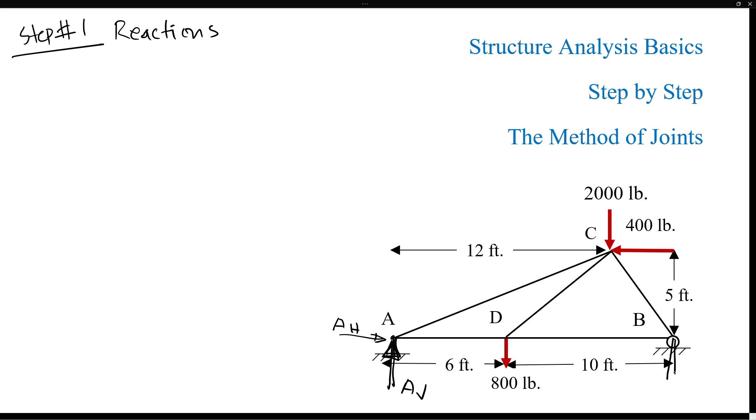So here we have a knife edge connection at point A. So if you remove that, there will be a vertical force AV and a horizontal force AH, and then you remove this rolling contact at B, so there will be only the vertical force. So we have the free body now, all the external forces are shown. To find the reaction forces, you'll have to take moments at each of these points. So if you take moments with respect to A and sum everything to 0, that will give you the reaction

at point B. So for the 800 pounds, that will do actually a clockwise moment with respect to A. So it will try to rotate clockwise. So that's going to be negative 800 pounds times the distance from A, 6 feet, minus the 2000 pound, which will also do a clockwise moment, and that is 12 feet away from A.

And then the 400 pound will do a counterclockwise, so it will try to rotate the whole structure counterclockwise. So that will be a positive moment, 400 times, and the line of action of that force is only 5 feet away from point A. So we can say 5 feet there, plus the reaction at B will also try to push this upward right here and rotate the entire structure counterclockwise with respect to A.

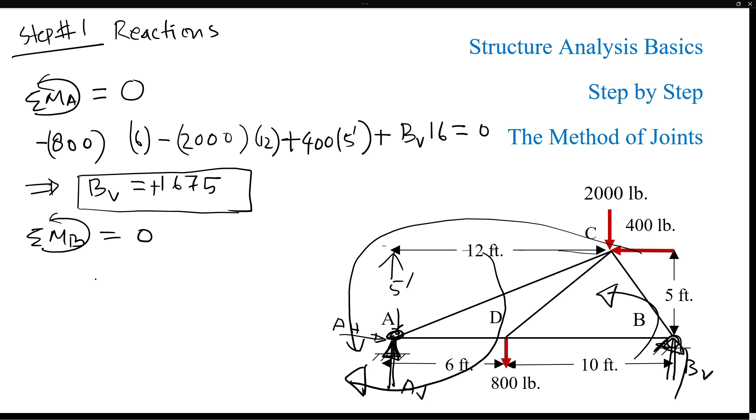And then if we take moments with respect to B, similarly we can calculate the reaction at A. So the 2000 pounds now will cause, with respect to B, a counterclockwise moment. So that's positive times the distance of the 2000, which we can calculate as 6 plus 10 minus 12. Then plus the 800 pound will also do a counterclockwise moment, that is 10 feet away from B,

and also we have this plus 400 pound at C. With respect to B, it will do a counterclockwise, and the line of action of that 400 force is 5 feet from B. And then we have the reaction at A, the vertical component. So that will do a clockwise. It will try to push this structure upward, making a clockwise motion, and it's a total of 16 feet away from B.

So then we can calculate the reaction at A. I found that positive 1125. And the horizontal reaction at A, we can simply do summation of Fx, that will give us the horizontal reaction. So plus AH minus 400, that's the total load in the horizontal direction. So AH will be 400. So this is step number 1 in analyzing a structure, to find the reaction forces.

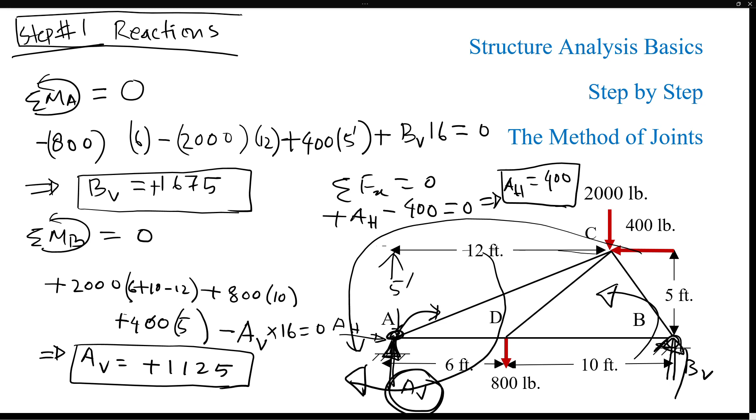Next step, we are doing the concept called the method of joints, where you only look at these joint points. So these are the joints of this structure. So we can look at different points. Let's look at point B only. If you look at point B, you only look at point B. So there is one force carried by member BD.

So this is my point B, and then we got this force, which is BC, and the vertical reaction at B we calculated 1675, and then this angle we can calculate from this triangle. If you look at this triangle, this is 4 feet, 16 minus 12, so then this angle we can simply do tan inverse 5 by 4. That will give us this angle. I calculated that 51.34 degrees.

So this is 51.34 degrees. Now here, if you do summation of Fy is equal to 0, we can do plus, I think this is 1675, not 1175.

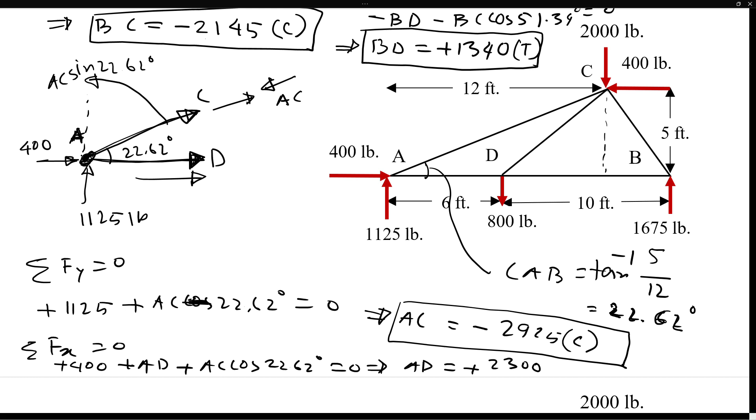Now we're looking at point A. We originally assumed the force in the direction from A to D, so it looks like it is pulling point A, so this will be in tension.

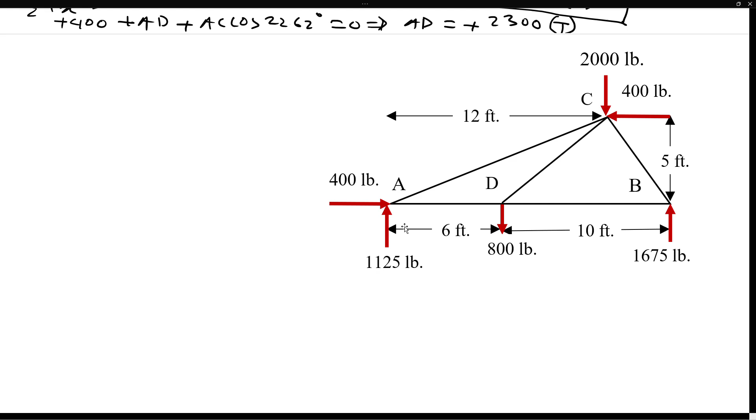Next we're going to look at point C. So then we'll have all the forces of this member. We know AC, AD, BD, BC. The only force unknown is CD. So we're going to look at that now. So look at point C. Let me draw that. Point C here.

I'm going to draw a little bit in a way that, so this is our situation. So that's A, D, that's B. Remember, we are looking at point C only. We're not looking at any of this. However, it's just going to be easier to see the angles by drawing this way.

So the angle A was 22.62. This one I calculated 39.8. Simply what you can do, so that is 5, and then 16 minus, and this is 5, this is 6, so this is 12, so this is going to be 6 foot.

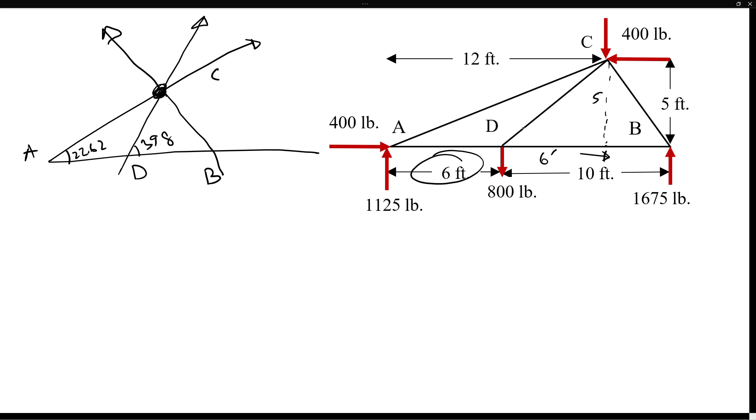So this angle I have calculated is going to be tan inverse 5 by 6, which is, I found, 39.8 degrees. This angle I calculated as 51.34. We have shown this previously. So here we're looking at point C, we're not looking at A, D, or B.

So at point C we have 400 pounds here. Force, we got a vertical force here, 2000 pounds. And we got all these different components. So this one is simply CA. So I can do D, B, like that. So now if we do summation of Fy, Fx, then we can calculate this DC.

So if we do Fy, the 2000 pounds is negative, so it's going to be minus 2000 pounds plus AC sine 22.62 degrees. So the vertical component would be sine 22.62 degrees. And then the BC force, there is 51.34 degrees. So that's going to be BC sine 51.34 degrees plus DC force.

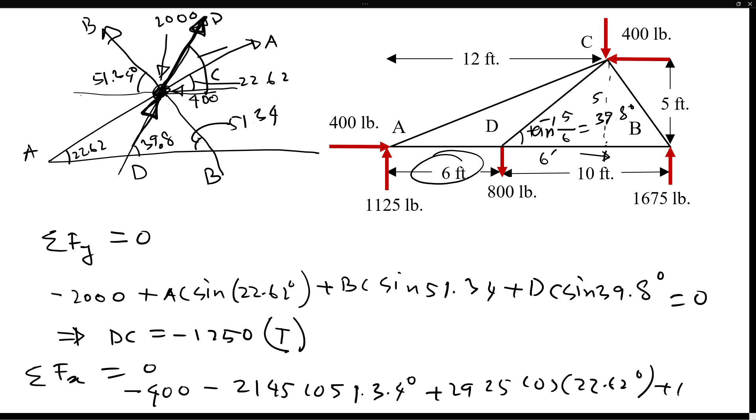You can verify this calculation by doing Fx equal to 0. It should be exactly the same as this 1250. So minus 400 minus 2145 cosine 51.34 degrees, then plus 2925 cosine 22.62 degrees, then plus DC cosine 39.8 degrees.

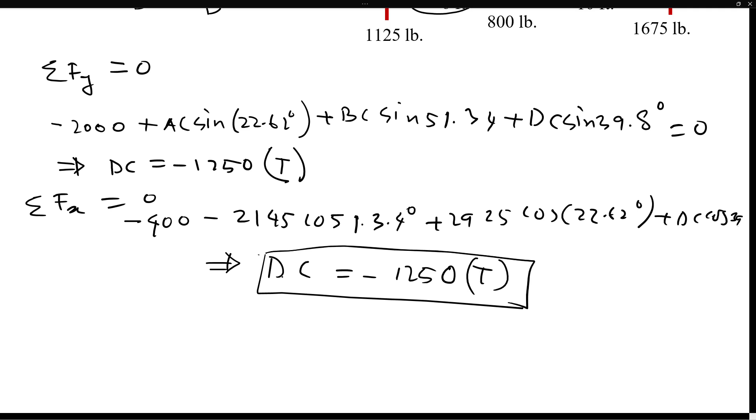So then you can solve for DC. You will find the exact same thing we have found. Again, the plus minus is not that important. Is it pulling that point or compressing that point? In this case, at the point we're looking at, C, it is pulling that point. Therefore, it is in tension.

Now, when you finish solving all this problem and find all the components of this member, you will have to show the forces in the triangle. So, for example, the AC member, you showed that it was in compression. So here the force direction would be like this. And then what do you find for AC? Let me go back there.

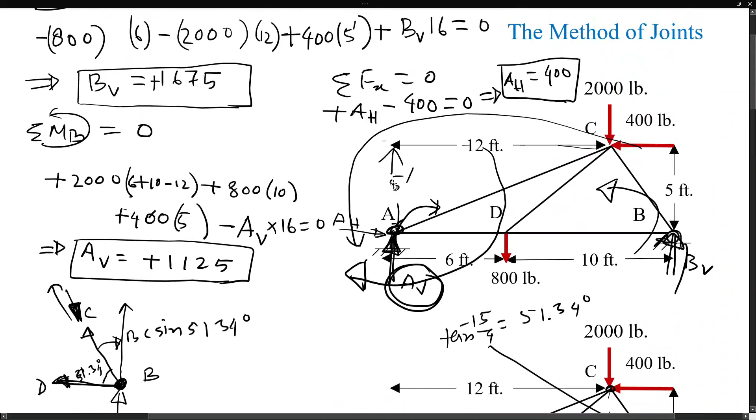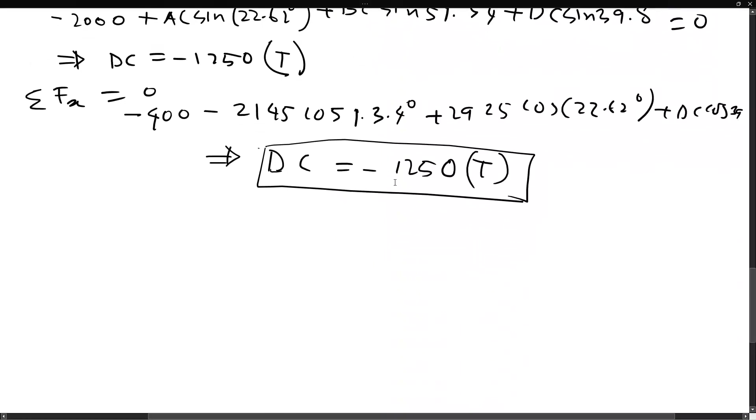AC member, what do you find for AC here? Yeah, we have it actually here. So here is that AC force. So we found 2925. That was the AC force. It is in compression, and here the direction is shown like this.

For example, this BC force, it is also in compression. So here the direction will be in this direction, and also at this B point, the direction would be in this way. And I think this force was 2145. So this was 2145. Similarly, you show each of these forces.

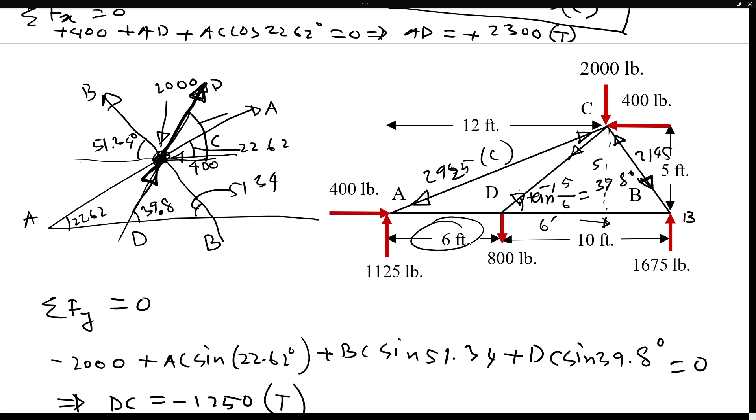So DC, for example, was in tension. So it's going to be actually in this direction here, basically pulling that point. So it's going to be like this. And also similarly, you can show AD, BD, and so on.